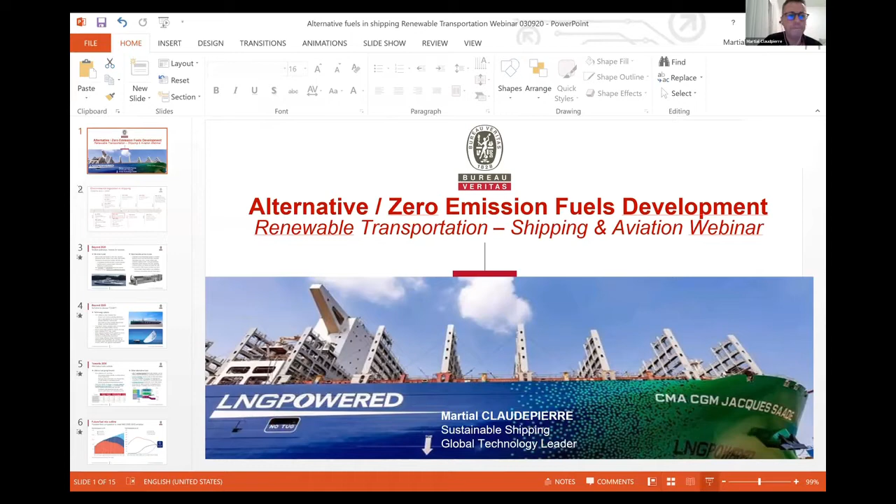So yes, the objective of this presentation is to show today's situation of shipping, confronted with a big challenge, in particular from the regulatory point of view. The IMO, which is the arm of the UN dealing with shipping, has fixed a very ambitious target for shipping in order to comply with the Paris Agreement.

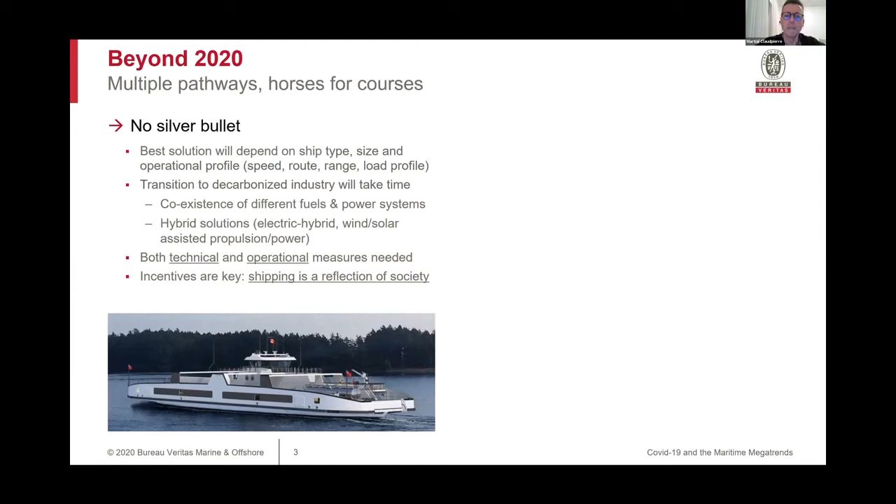So we have of course different targets for this long way to sustainability. We have 2030, which is aiming to reduce by 40% the amount of greenhouse gas emitted by shipping compared to the 2008 level, and there is also the 2050 target, which is aiming to reduce by 70% the amount of CO2 emitted by shipping. So all in all, we are almost in the same situation as aviation.

We have to engage a large technological change, from the fuel perspective, but also from the ship itself. It cannot be dealt with by operation anymore. It's really something that has to be completely innovative, in particular from the fuel point of view.

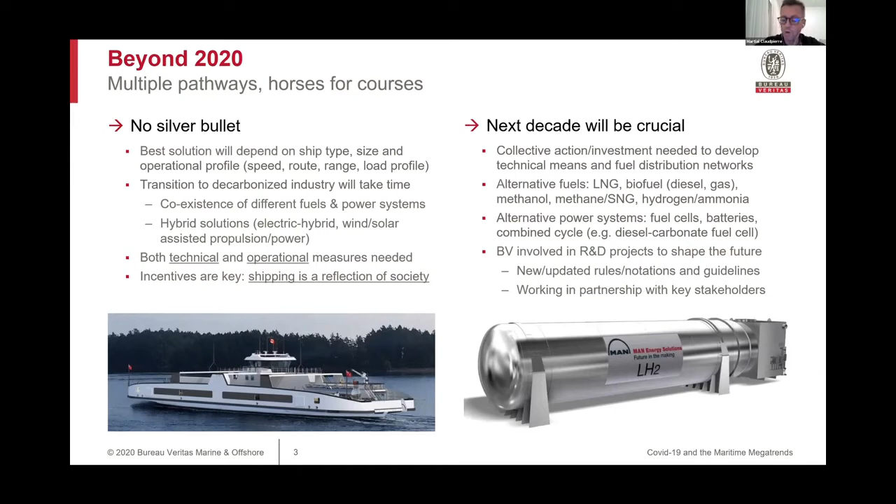So we have here a situation where we are having new design ships. A cargo ship or a passenger ship will last more or less 30 years. So the ships which are produced now should comply with this long-term objective. And unfortunately, this is not the case for all of them. Some of them, as displayed in this slide, are on the right way to comply, in particular in the case of the use of LNG as a fuel.

Don't get me wrong, I'm not saying that LNG is the solution, but it's an available source of energy which is at least solving the pollution and partly reducing CO2 emission, partly only, but it's better than nothing, right? So we have large vessels now which are produced with LNG as a fuel.

And very importantly, we are now considering a second life for this kind of vessel, meaning that one vessel can be designed and constructed with LNG as a fuel, and later on can be upgraded to a fully decarbonized fuel. And we will see which type of fuel it is. There is a slight difference from that point of view between shipping and the other transportation means.

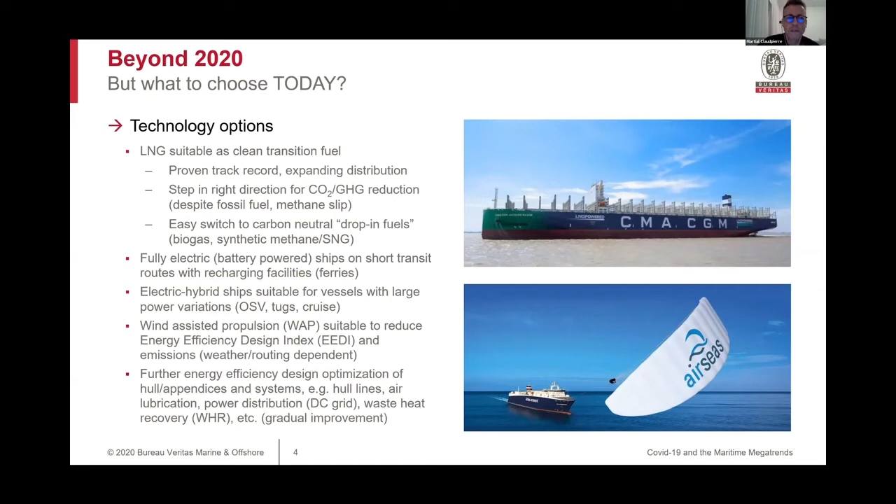So wind, of course, is the topic of this seminar, and is a very important way to reduce. But the objective of this slide today is to introduce the situation for the fuel itself. So LNG is today taking up. There are about 100, 200 ships in operation with LNG as a fuel. LNG is a fossil fuel, so it doesn't solve the long-term issue, but it's much better than having heavy fuel oil, which is today the situation.

We have ships which are still using heavy fuel oil, which is maybe the most dirty fuel ever produced on Earth. So at least we have LNG, which is clean from the emission point of view, and which can reduce emission of CO2 by about 20–30%.

So for other alternative fuels, we have a bouquet of different choices, which are less mature in terms of availability as a fuel. Those are products from the chemical industry or the oil industry, which are of course well known, but not really available as a fuel for shipping. We have LPG, which is very well known for buses, cars, etc. Methanol, which is also used in some ships, and which is very promising. Green methanol is a kind of decarbonized fuel, and we have of course hydrogen.

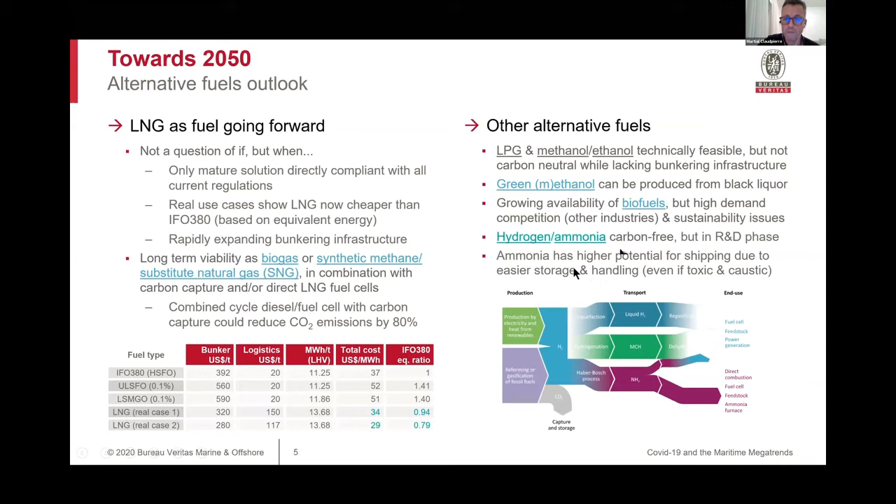So what is the situation today? We unfortunately still have an oil fuel fleet, which is by far the majority. So we are late, yes, that's true. But when we look at some predictions, we might see that there will be an inflection of the curves, as displayed on the right-hand side of this slide, meaning that we might have a possibility to meet the 2050 target, provided we make a huge investment effort in the type of fuel, and also a little bit on the propulsion system.

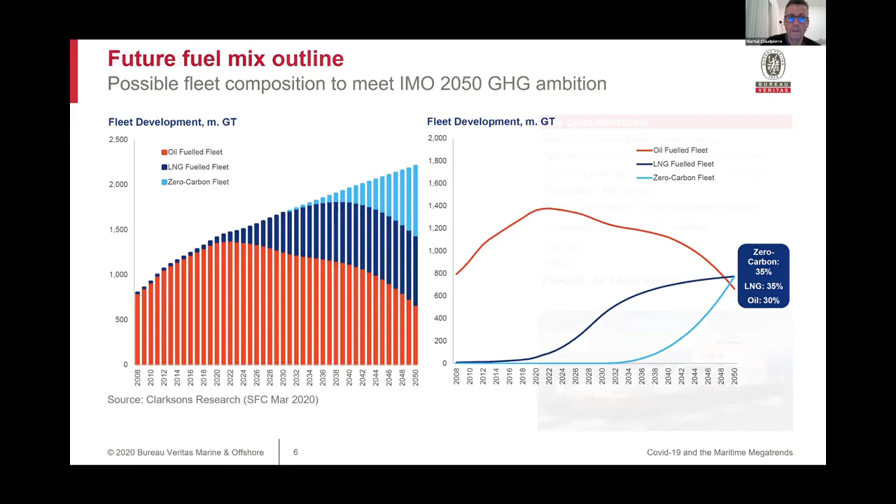So today we have, as I already introduced, these different fuels which are considered and already in use for some of them. So fossil will mean LNG, LPG, methanol, ethanol. Interestingly, there is some bridge in terms of production of LNG. So we might consider this so-called power to gas, which was very extensively developed, for synthetic LNG, which will be a way to reduce the carbon footprint of the LNG.

So in the shipping industry, we are very pragmatic. We don't consider a full switch over. We consider a very progressive way to mix some synthetic e-LNG with the fossil LNG, and thus to have a drop down of the CO2 emission slowly, step by step.

We have also biofuel, oil and gas, which are already used in some situations; some shipping companies are already using biofuel, liquid fuel. And for the hydrogen, as I said, it is more or less limited to small ships already in use, but ammonia is considered as a carrier of hydrogen. So the way to use hydrogen for long trade cargo ships or passenger ships will be ammonia.

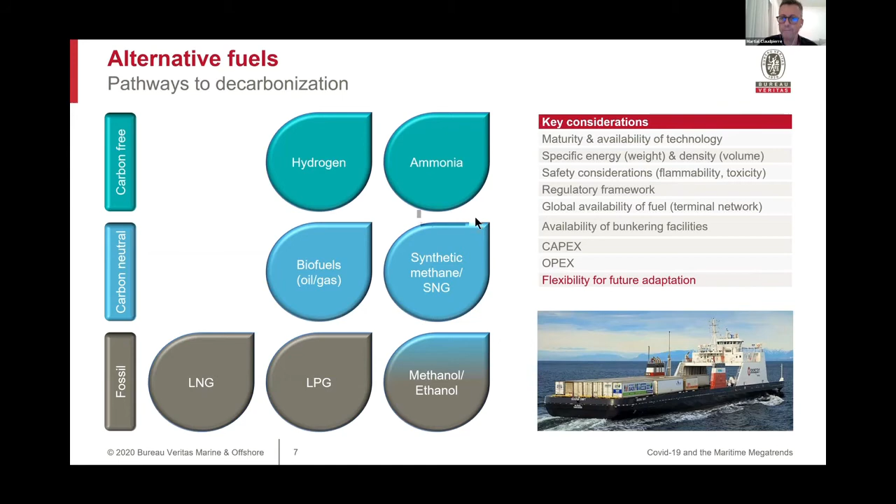So biofuels are already used by some big names. You see Maersk is already using biofuel as a mix. It's not 100% fuel, but 10-15% of total fuel is from bio production. And other companies like GoodFuels are proposing biofuel as well to Boskalis, which is one of the most important stakeholders in short range shipping.

So if we can try to sort two sectors in the shipping industry, we will have the short range ships, on the right hand side of the slide, which are already under scrutiny because they are operating very close to populated areas. They are also navigating in emission control areas, so they are already under regulation for reducing emissions. And due to their low power, they can be selected for electric propulsion systems, and so it will be very much possible to switch to hydrogen.

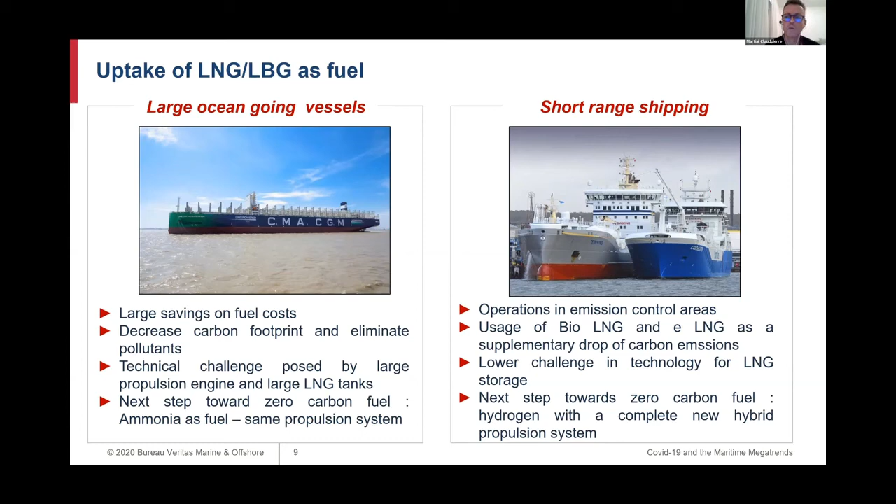This big diesel engine will be able to burn different alternative fuels. This is already the case. They are already used as dual fuel for both fuel oil and gas, and tomorrow they will also be burning ammonia as a fuel. They will be slightly upgraded. From the LNG perspective, just to mention that, of course, we have this power to gas, which is very promising to reduce the LNG footprint.

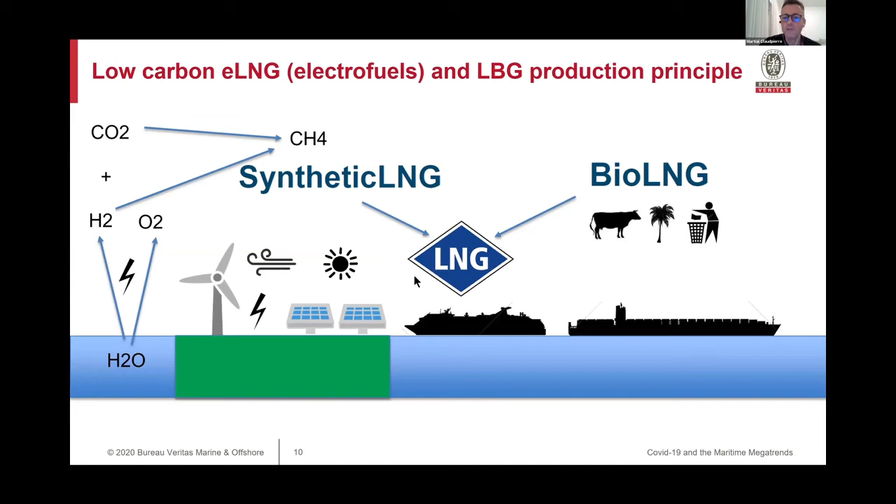And methanol as a fuel. Methanol as a fuel is reserved for short range. There are some difficulties to have methanol available for ship fuel, but it has already been in use for more than a decade.

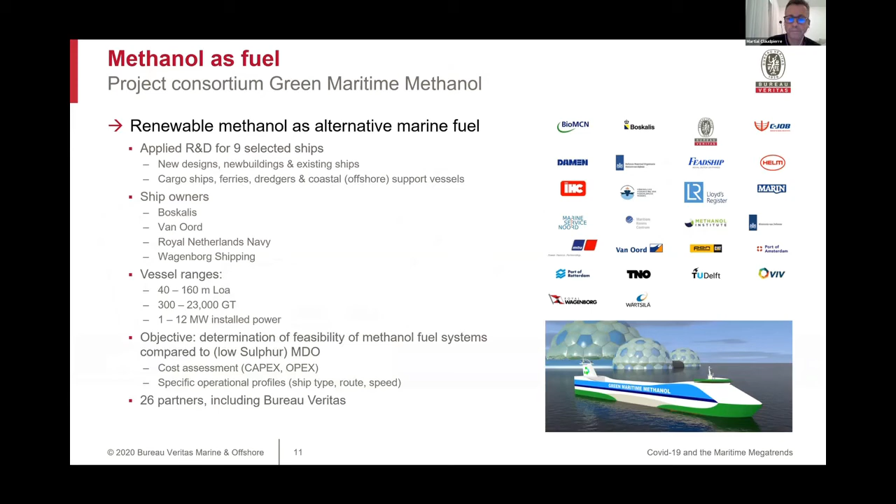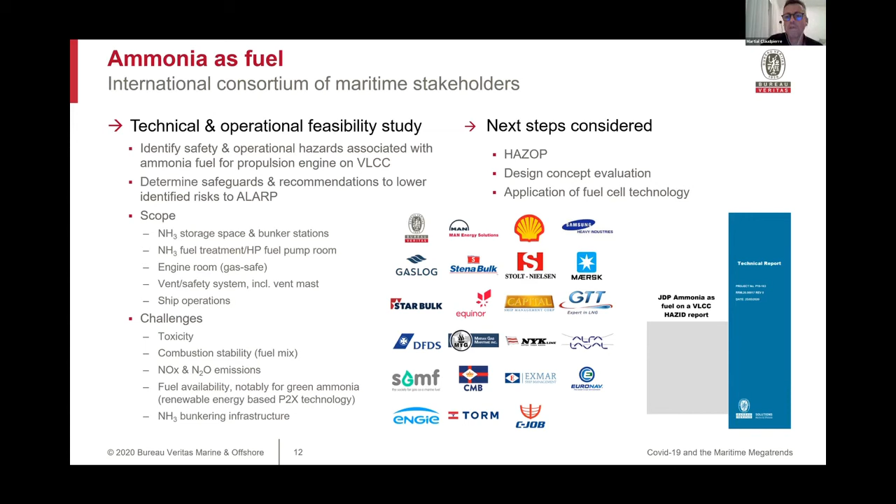Ammonia as a fuel, I may insist, is the most promising way to reduce or to eliminate carbon emissions from the shipping industry. So we are now looking at the risks involved with this new fuel. Of course, we cannot trade environmental benefit against safety in shipping. So we are now looking with many stakeholders at what the risks involved with this new type of fuel are. And let's go ahead, because there is a huge demand.

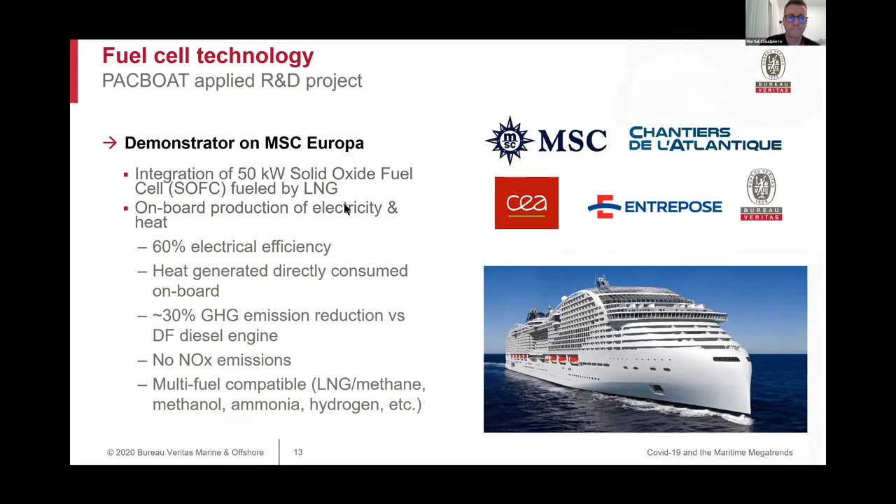Fuel cells: limited power, but why not have fuel cells producing energy for the accommodation? This is the case in large cruise ships where the main propulsion system is burning LNG, and some accommodation power is produced by hydrogen and fuel cells. And electrification of ships, which is the key point for using hydrogen as a fuel.

We will have to switch a large amount of the short range ships, which have a long way to go, but we already have very nice demonstrators which are using, like in the car industry, a typical hybrid power. We have battery power to store some energy, for peak shaving in order to increase the efficiency of the ship, and enabling also online diesel electric, diesel engine and fuel cells. So this is the case for this ship that you can see here on the screen.

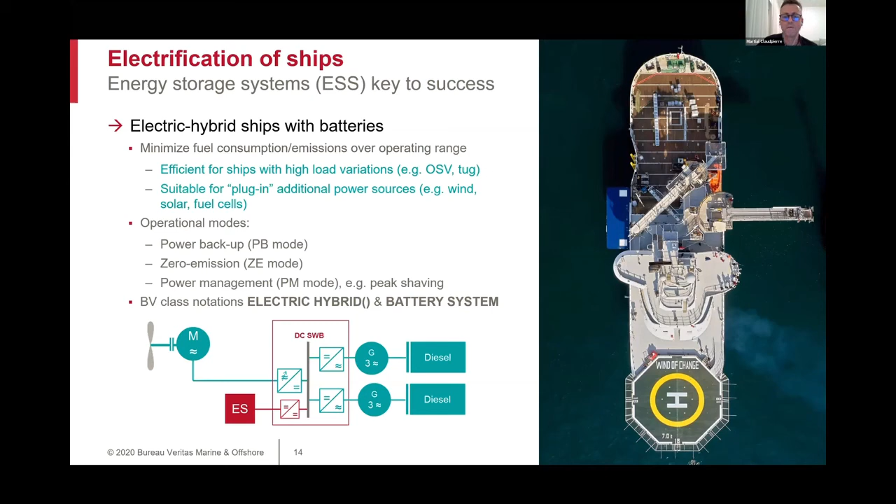So I'm done with this presentation. I wanted to try to expose the different options from a realistic point of view. I'm not saying there is no other way. Of course, we are very much involved in wind energy, which is fantastic. And as a human being, I love sailing, so I am very much in favor of wind energy. But we cannot eliminate the option of the fuel itself. It will remain besides wind power.